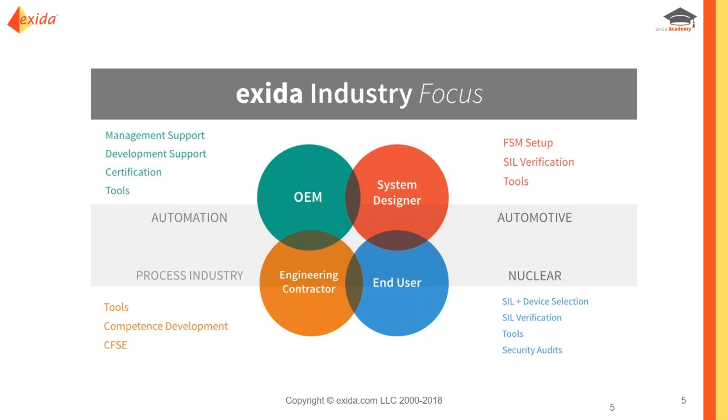How we're able to achieve all of that is we set up different silos of our business, whether it's consulting, where we're going out there just helping them where they're not achieving any type of certification, or working with engineering tools. This is an area I learned quickly to love. I was one of the old-fashioned ones who wanted to do it all myself, but man, the tools are so nice, they save you so much time.

Today we'll be talking about product certification and how to use a certified product. And then, of course, we have training, reference materials, and personnel certification if you yourself want to become a mentor or leader in the industry.

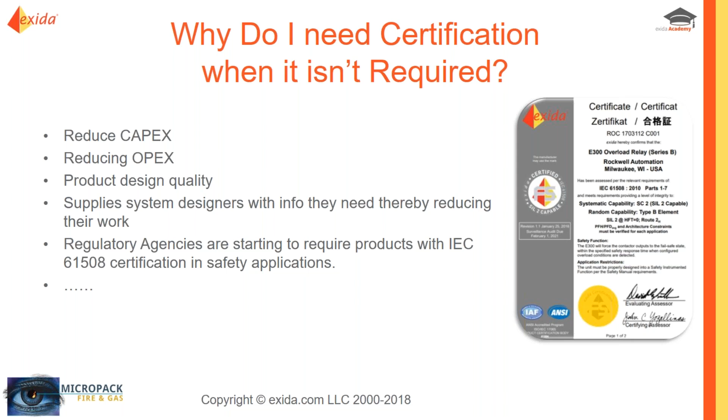Now let's go through these certification processes, and then we'll pull James in, who will teach us how to use these products correctly and the advantages and disadvantages of them.

Before we talk about the 3 paths, I want to share one misnomer: people think when they get a product certified, the certifying body has to do everything. No — that's only if the manufacturer doesn't have experts in-house to do these tasks. The only 4 things exida, or a certifying body, really needs to do are the black boxes you see in front of you: the gap analysis, the architecture concept review, the safety case review, and issuing the certificate. For our certifying body, those are the mandatory items. The rest, shown in red, there's no reason the manufacturer can't do those themselves.

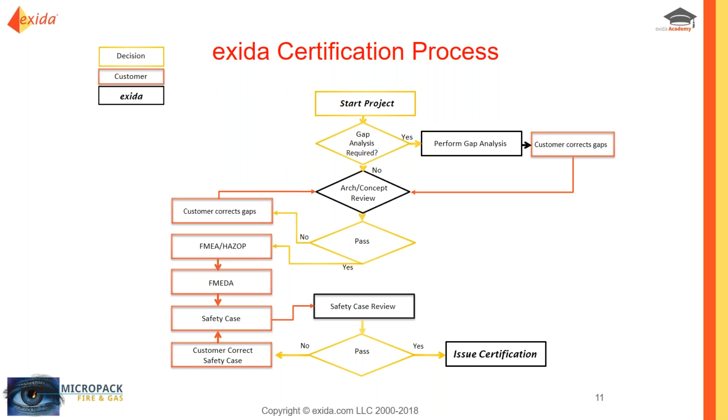Now we'll talk about the different certification paths, since there are 3 options available per our accredited scheme. The first is the design and test process that's fully compliant — that's your new product, maybe still in development, with no field history. You can still go through the process.

Option 2 is where you have a product you want to make changes to — it's been out there a while, and you can produce operating hours, so we can say it's proven in use. The last one is a product that's probably been around forever and is never going to change, maybe end of useful life, but people still want it. You can get that certified as 'no changes allowed,' meaning no modification procedures are needed. That one you can usually get certified quickly because you don't have to meet as many of the standard's requirements — that's also an option.

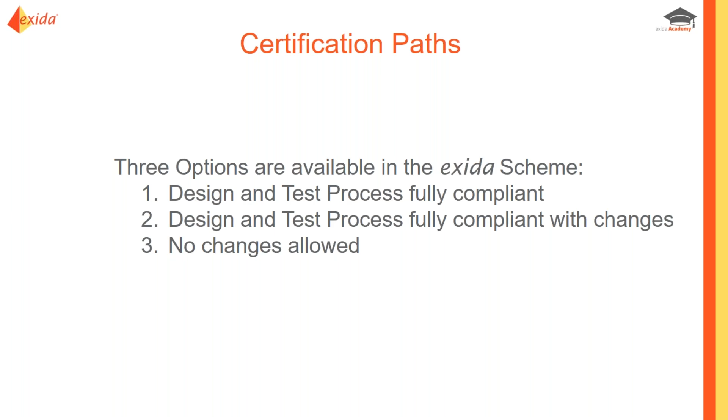So let's go through those 3 options. The first, as I mentioned, is the new product with no field history. The first thing you want is that new design to have a full hardware failure analysis — that's your random failure integrity.

The next step is your new design has to follow the design process requirements. What does that mean? We want to make sure — what did you do for testing? Where was your validation and verification? Do you have an SRS in place? Show me the specs you thought through, because we want to make sure it was built correctly so that when it becomes a certified product and goes into the field, it follows a certain procedure to minimize any kind of risk.

That's your systematic integrity — to reduce systematic failures, make sure you designed it correctly and followed the procedures of IEC 61508, because it wasn't tested and proven yet. It's just a new product; we don't know if it's going to perform correctly. However, because you went through this process, we have better assurance of it.

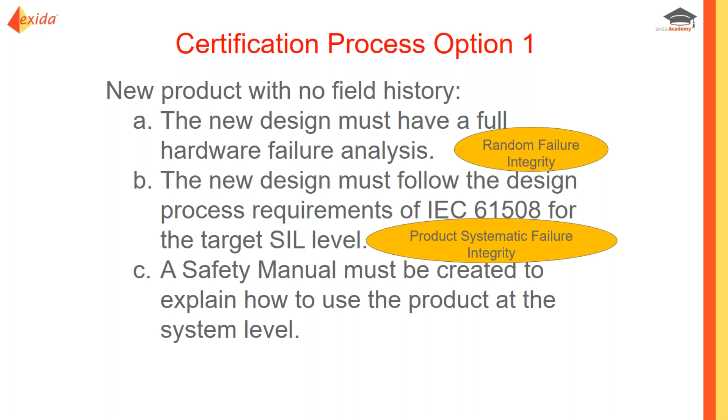The last thing you'll see in all 3 options is that you will need a safety manual created to explain how to use the product, which makes sense. If we look at that chart I showed you previously, that was really just the middle portion — there are 2 tables, one on the left and one on the right: the left says exida analysis reports, and the right says consultant client documentation.

Those are the 2 that just got added in, and we put those there so you could see what exida or the certifying body will do, and what the clients will need to produce. For a new product, as you go through that process, they'll need a functional safety management plan, an SRS, a validation test plan, and it goes on. Once you meet all the requirements, you get your certificate. And that's for a new product.

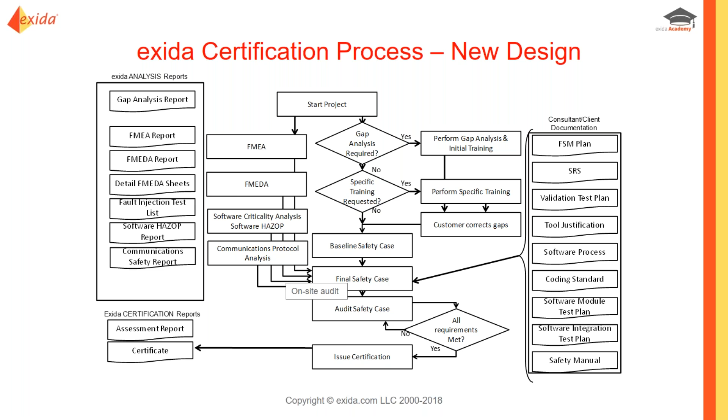I can go into much more detail on this, but we do have other webinars that go into more detail on these processes. If that's of interest, I can provide links for all these. For time's sake, I want to get this webinar over to James, because I feel his section will be very important for everybody on this call.

The next process is option 2. This is where you have a product that's well defined, with field history, shipment information, return information. Maybe you've had 100 products out there, so you have maybe 3 million hours for SIL 1, 30 million for SIL 2, or maybe 300 million for a SIL 3 application for proven in use.

What that's saying is, look, I already have that full hardware failure analysis - that's the FMEDA that will perform for you. What changes is that when you get to systematic failure integrity for that product, you don't have to do some of the design and beginning testing stages, because you've already proven from your failure and shipping information that it's a tried product that works. You don't have failures coming back.

The one thing you'll have to show is that you have a procedure to make changes. Do you have a modification change procedure? How do you make a change? How far back in the life cycle do you go to catch those changes? Because sometimes you'll make a change thinking you fixed a problem, but that change actually messed something else up in your product without you realizing it. So we want to make sure you go back far enough in the life cycle to iron out any other issues that may come from a different change.

Option 2 is probably the most popular - it's what most people go for. Why? Because it gives you flexibility. You don't have to run to a certifying body every time you make a change anymore. You can make your own changes, and when it comes up for renewal, you just tell the certifying body what you did. They'll review those changes, and you're off and going again. It's a very nice process.

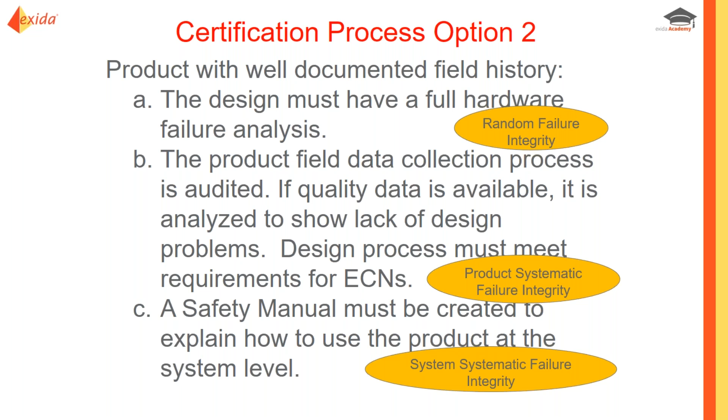Option 3 is for when, maybe, you have a product going end of life, or you need to beat your competitor to market and have it certified. You can go this route, which is basically like an instant in time - to this revision, this model exactly, I want this certified. I'm not going to make any changes. This is what I'm selling, and this is all I want.

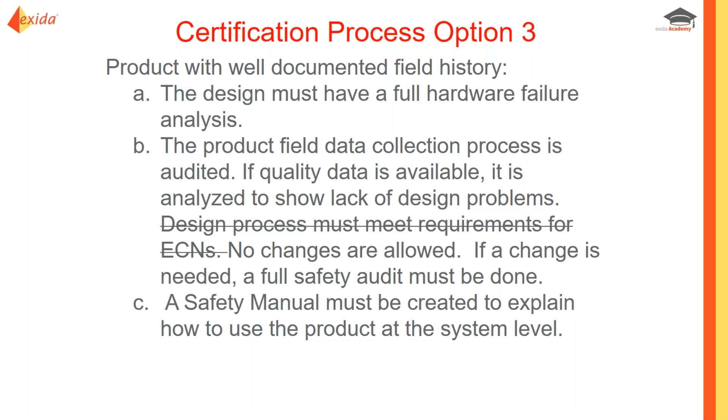If you do make a change, you're going to have to go back to the CB, because all that's certified is that one instance, that one revision, that one model. And then, of course, you'll have that safety manual that's going to explain how to use that product.

Look at all those red X's, or those red boxes there. Notice everything that you don't have to do. And that's why this process is so much quicker, because there's a lot of things that you can avoid, that you don't have to worry about.

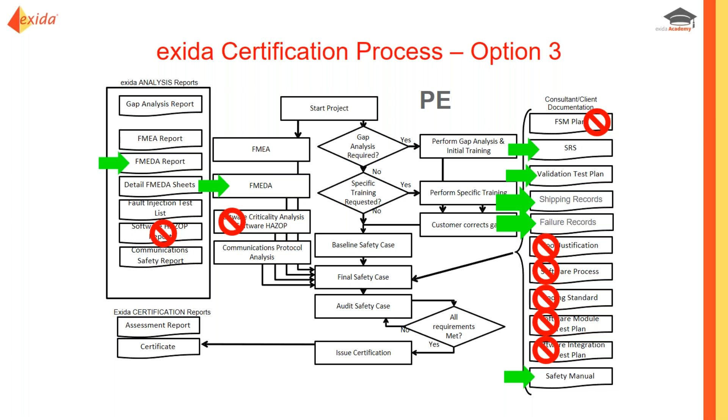There are people that have chosen this route simply because, one, they want to go to market faster, or two, maybe the opposite - they've been out there for so long, they just need to get it certified. Because end users are wanting these certifications more and more, since it's less work for them.

All right, so kind of to recap here, and then I'll jump this over to James. So what is the value for manufacturers? Well, the first thing is you get that third-party review of the product.

What is the CB's main objective? We want to find faults in the design, because that ultimately reduces the life cycle costs. It helps you with redesigning a product, because that can be so expensive. The sooner we can get in there and find anything, you can make those changes sooner.

The next thing is it does increase the marketing and the sales efforts. You now have something that's a step above your competitor if you get something certified.

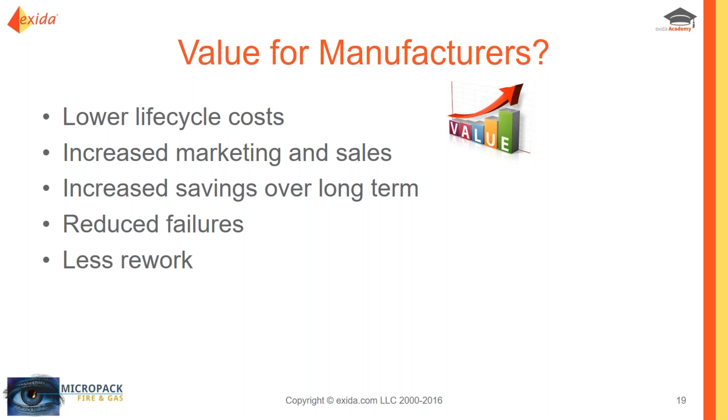And of course, there are going to be increased costs initially, because you have to pay money for a certification, but there is a lower risk with your product when it gets out in the field. You get less returns, you don't have to worry about rework, and there is a savings over the long period of time.

For an end user, here you're going to have less spurious trips. Why? Because it's going to help with unnecessary shutdowns, since you're developing your system correctly. Maybe you have too much redundancy in your current system because you didn't know if it could have redundancy, if it needed redundancy.

You do have that increased safety. You will get less failures in the field, because that end user is now using that product correctly. There's no guessing involved - they didn't have to do their own calculations. You come out with a more robust system.

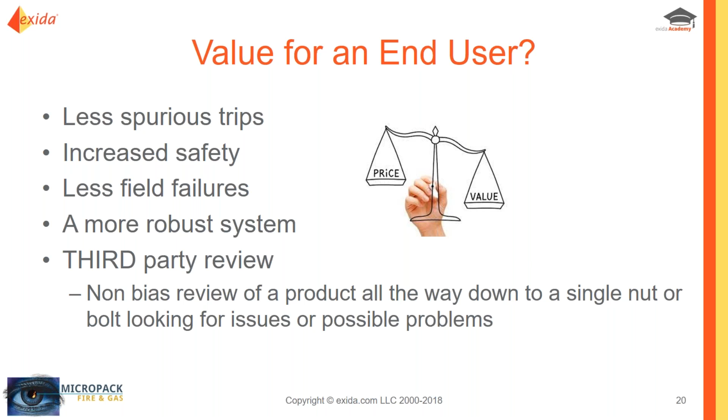And of course, most importantly, you get that third-party review. That's so important because every person that's selling you a product is going to tell you they're the best, with 30 reasons why they're the best and why their competitors aren't. Here's a way for you to say, okay, this is a third party - they're completely impartial. They judged it based off of numbers and analysis, with no emotion tied to it. So it's kind of nice, and end users usually appreciate that as well.

So the next thing here is, sure, you get your product certified, and it's what I said at the beginning - it's really not the end of the road, because in fire and gas, not only should you make sure the product is used correctly, but even the placement of that detector is so critical.

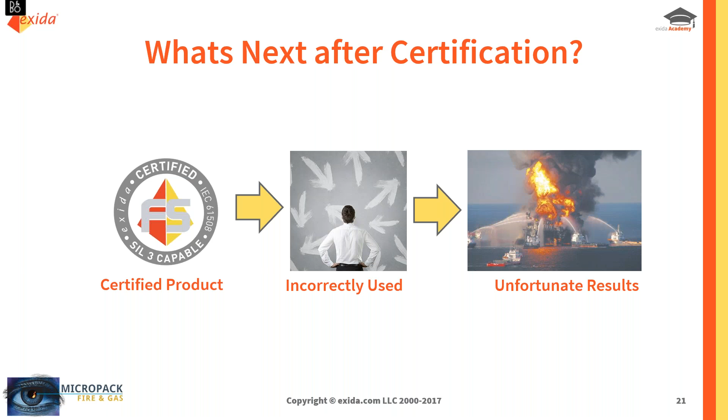We're a hazard detection company. We've been involved in fire and gas detection since the 1980s as an organisation based in Aberdeen in the northeast of Scotland.

We carried out the first fire and gas mapping review in 1989 in the Forties field in the North Sea. Although it wasn't referred to as fire and gas mapping at that point, that term essentially was coined in the early 1990s. Our core business is very much in consulting and software, the provision of fire and gas mapping software tools.

The Micropack consultancy team design hundreds of fire and gas systems annually. We also provide our 3D fire and gas mapping software, which is commercially available, and provide fire and gas training should an organisation wish to take that expertise in-house. Micropack run the Micropack Exida Fire and Gas Detection Design and Technology course, the Fire and Gas Practitioner course.

Those areas of the core business are very much related to the consultancy, but we do have another arm of the business, which is flame detection. We pioneer in intelligent visual flame detection, but a lot of people don't realise that we also develop conventional flame detection, or some of the more traditional technologies as well, the likes of triple IR flame detection, the radiant-based flame detection. So we essentially have two main strands of the business: flame detection, and consultancy and engineering, and the software as well.

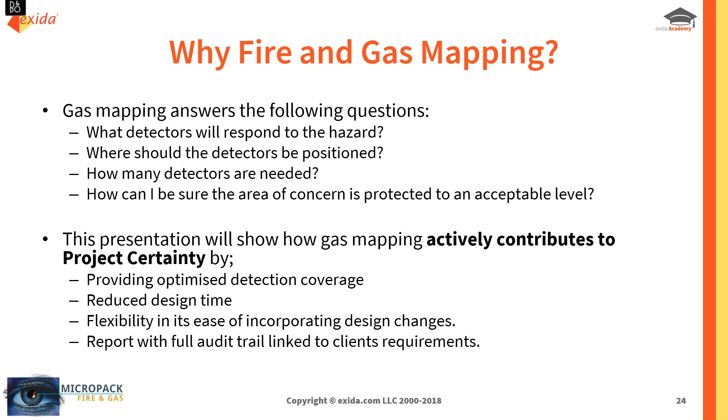Gas detection mapping, if applied in a reasonable manner, can help achieve project certainty by providing optimized detector coverage which is verifiable. It can help reduce design time, assist in design alterations, and provide a fully documented audit trail of justifications of the design. It provides performance targets of the system, and all the assumptions and detector location information can be stored within the gas detection mapping project.

So what is gas mapping? Well, gas mapping is the holistic process of determining detector placement through the application of both engineering knowledge of the detection technologies, the application and performance requirements of the system, and also an adequate modelling tool. Notice that engineering knowledge came first in this instance - with any modelling tool, its purpose is to verify the design of an engineer.

The software tools shouldn't drive the engineer, but this has been somewhat lost when it comes to fire and gas detection design. There's been a real drive towards how important the software aspect of the design is. So we feel it's quite important to bring this back more in line with other engineering disciplines, where the engineer still designs the system and the software verifies any assumptions made in that process.

With respect to the process, the engineer would typically review the hazards, the escalation potential, performance definition, mitigating actions, and so on. The modelling tool of choice would then be used to apply detection thresholds, detector positions, the detector voting of the system, which provides the detection coverage and contributions. The engineer then reviews those coverage factors and takes a decision on the adequacy of the layout of detectors, and logs those results.

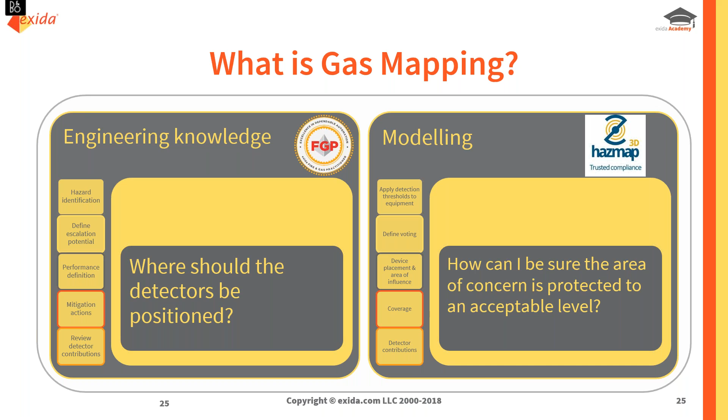As we're designing a gas detection system, rather than a gas sampling system, we're concerned with the gas accumulations which might result in a deflagration. A common performance requirement for gas detection is to prevent an explosion overpressure of 150 millibar or greater, which is commonly associated with pressure-induced damage.

From that, it's quite clear that we don't want to design to detect small leaks, as first of all it's virtually impossible, and it's not a particularly risk-based approach. What we want to design is to detect various gas dispersions that will likely result in the placement of detectors in locations where the gas accumulation may actually present the risk, the accumulation of gas rather than just where the gas may go.

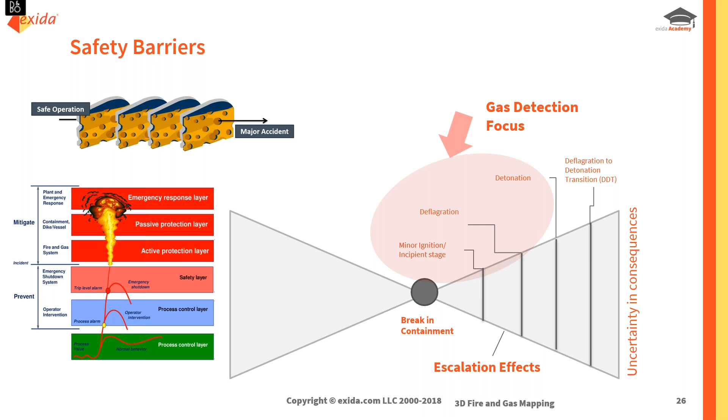This brings us to the application of performance targets. In order to verify detection performance, we require a yardstick against which we can measure the coverage. How we determine that yardstick is the escalation potential of any given process or facility. The easiest way to articulate this is to ask whether we would want the same detection layout in an open onshore process area, where personnel can run away or the processes themselves can be easily separated, compared to an offshore congested area where a gas accumulation would occur in a confined space. Ultimately, these differences will determine the ignition potential and the escalation of that ignition, which will later form the target that we want our gas detectors to meet.

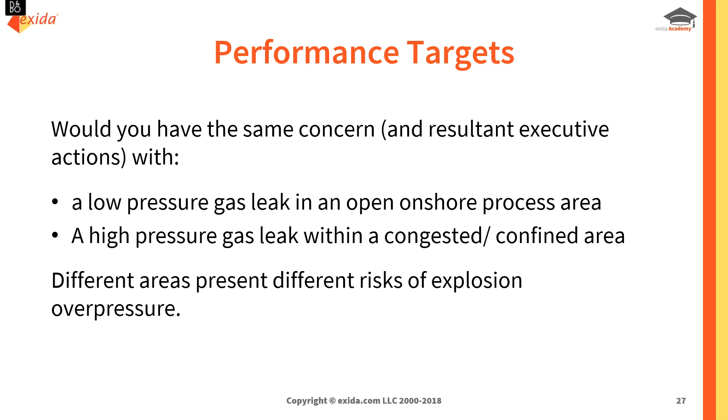With these performance targets being fundamental to the resultant number of detectors required, we define the performance targets as a formal statement of how you want the gas detectors to perform. In order to do this, we require a methodology from which to define that target. This methodology can stem from an end user's own guidance or philosophy on how to design gas detection, or it can come from a national body with a standard or regulation, although they are not particularly common. So there's usually a gap there with respect to what the overarching methodology should be, and where those gaps exist, it's important to iron out in the early stages what the intention of the gas detection system is, so that all parties are clear on what the philosophy behind detection should be.

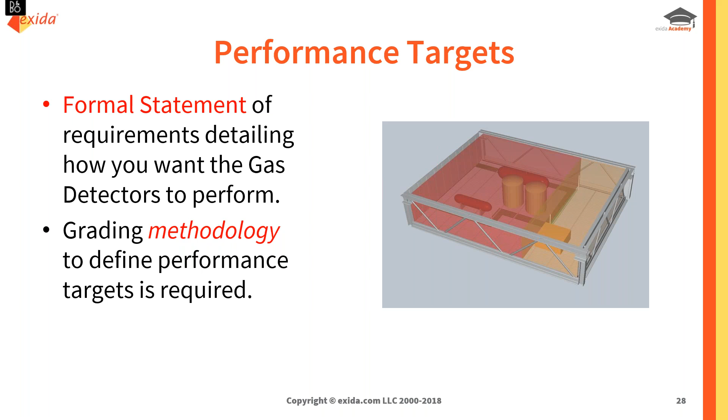There's an ongoing debate in the industry about where and when to apply dispersion modelling to gas detection design, where we would be predicting where the gas can go. Unfortunately, there's a lot of contradictory and often misleading information out there with respect to this. It can be difficult to know what methods are applicable and ultimately what design method would present the optimized layout.

When deciding a way forward with respect to gas detection design, we have to consider what the intention of the design is. Our gas detectors are installed to mitigate the consequences of a release of gas. The Health and Safety Executive in the UK, in their research into the subject, discusses that the systems are there to prevent explosion overpressures above a specified threshold. It's therefore safe to say that our design should focus around ensuring that a certain volume of gas, which would present that gas explosion overpressure, doesn't occur without being detected by a device. That's where the target gas cloud methodology comes from. It sets the volume of gas of concern as the performance target and guides the designer to position the detectors so that that specific accumulation doesn't remain undetected.

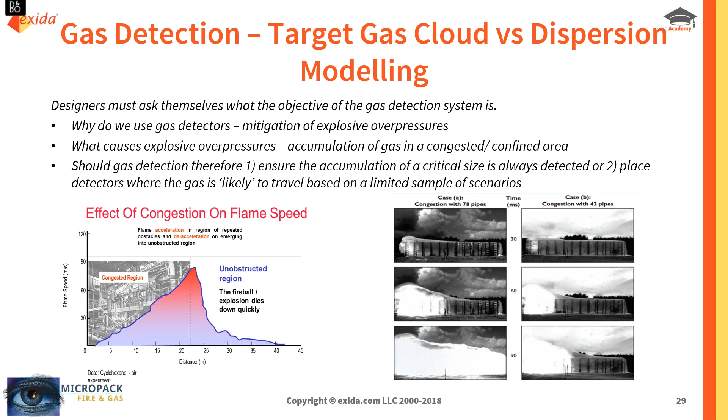This approach of ensuring gas clouds of concern are not undetected doesn't fit well with a method which attempts to detect based on probabilistic gas dispersion. These methodologies often allow detectors to be removed if the gas doesn't travel in that direction in enough of the dispersion scenarios. The approach doesn't account for the fact that those scenarios may result in the highest consequence with respect to accumulation of gas. When we consider risk approaches like, for example, as low as reasonably practicable, it's fair to say that if a gas detector only detects gas in 1% of release scenarios, it could be removed.

But this would be a difficult justification in court, for example, which would use the so far as reasonably practicable model, which is a far more precautionary approach, and generally would say that if a barrier can be placed and wasn't placed, that's a very difficult position to defend.

In the event that there is an explosion, for example, with multiple fatalities, someone could argue that we removed detection because it was only operational in 1% of our dispersion models, so the problem was unlikely. But a prosecution lawyer would rightly say, what do you mean it was unlikely? There's been multiple fatalities. So this is particularly compelling when we consider the alternative method, which would ensure that a gas cloud of concern would be detected 100% of the time, notwithstanding all the discussion that Ted had at the start of this presentation about how reliable our gas detectors are and how reliable the mitigation functions would be.

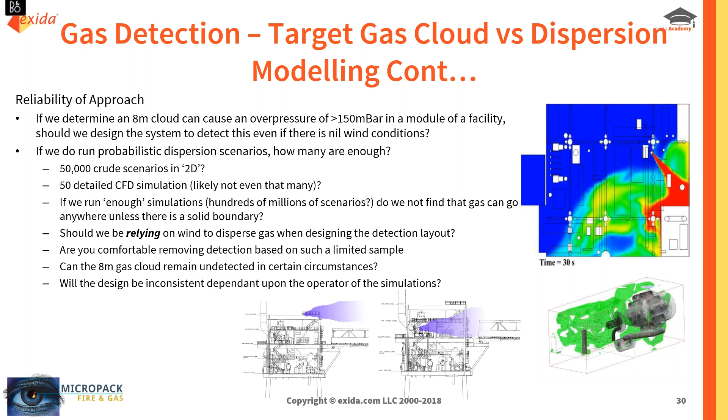So we'll start by looking at some of the regularly cited statements on gas detector effectiveness. Now, the UK Health and Safety Executive statistics show that around about half of the gas releases in the North Sea in the oil and gas industry were undetected over a 20-year time period.

This has led to a narrative being drawn which is not necessarily based on factual analysis. The narrative states that gas detector placement is inadequate and the methods on gas detection placement are inadequate. What's not considered in that analysis is whether the gas releases were large enough to the point that the gas detectors would be expected to respond.

And that's with respect to accumulation, not the size of the release itself. It doesn't review that the layout of the detectors was even in compliance with the method which was expected to be employed. And also, were all the gas detectors even operational at the time of the release? Now, with the number of gas releases, it would be difficult to gather all of that information, but we should be a little more hesitant about drawing fundamental conclusions based on that sample, with that limited data.

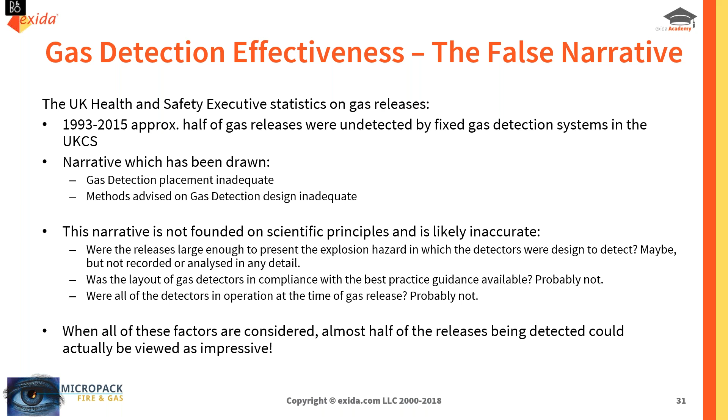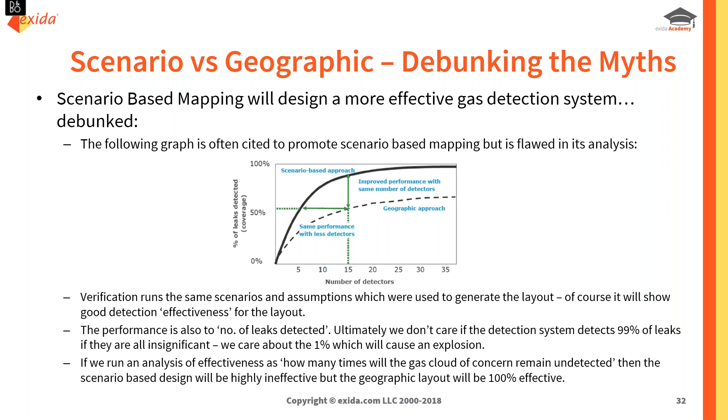So the number of detectors in a scenario-based assessment will be primarily dependent on the number of scenarios that the designer decides to run. It's worth noting at this point that no overarching framework or international standard or guidance exists which can be used to determine how many scenarios are adequate. This opens up the significant potential that two identical areas with identical risks and processes will have wildly different gas detection layouts. A nightmare for change management and auditing, I'm sure anyone in those industries could appreciate.

If we run only one scenario and place the detectors where the gas goes, this will result in hardly any detectors, and they'll detect 100% of the gas release scenarios modelled. Now that's an extreme case, but does show some of the problems associated with this form of assessment, in particular for external applications. Now, no engineer would class that as a representative sample, but I have seen designs which would rely on between 10 and 20 computational fluid dynamics scenarios and place detectors based on this.

This is with no appreciation given to whether the gas cloud migration to that location actually presents the root problem the gas detectors are intended to mitigate, which is explosion overpressures.

So even scenarios where tens of thousands of releases are modelled with some fairly significant assumptions built in, surely can't be classed as adequate. As previously mentioned, this is still less than 1% of the potential scenarios which could occur, and generally won't account for factors, as I said, like near field blockage, which impact on practically every gas release in a process area.

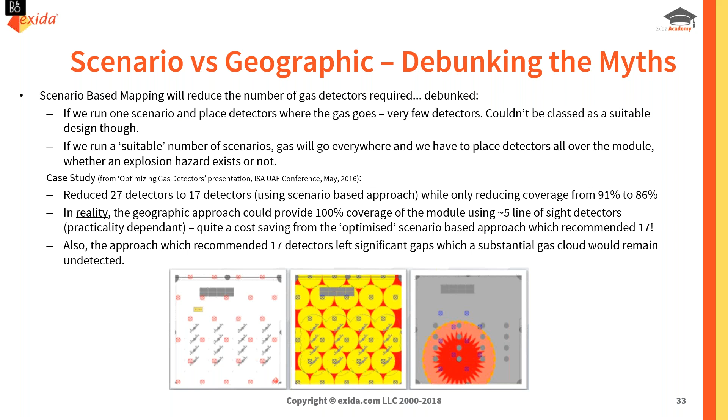Now, moving away from the methodology aspects of optimized design, detection technology, as with flame detection, is critical in making sure that we don't over-engineer the system. The technology also needs to be deployed in adequate locations to allow for maintenance accessibility, and also in such a manner that it will allow adequate operation of the devices themselves.

So should open path gas detectors be used, for example, a clear line of sight has to be required to make sure that the receiver can receive the signal from the transmitter.

The gases intended to be detected have to also be reviewed to ensure that the technology applied will be appropriate in detecting that gas, along with calibration requirements to ensure that we don't underread a potential gas release whenever there's potentially mixed streams, for example, in the process.

Set points of the devices should also be considered with the voting logic, as these kind of decisions are going to impact on the resulting coverage and the suitability of the system. If executive action requires 2 alarms on the high gas alarm set point, then this will result in a poorer target gas cloud coverage compared to executive actions on 2 low gas alarms, for example, with the low gas cloud diameter being much larger.

But this can give rise to a higher degree of false alarm potential if you lower that set point. So it brings us back to the selection of the technology based on the environment, which is just as critical as the modelling portion of such a review.

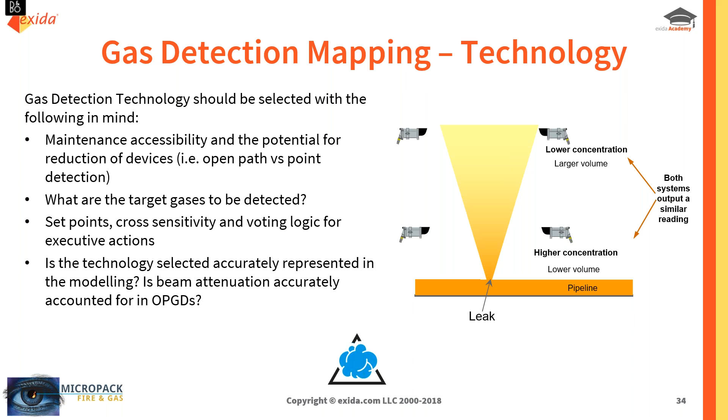We then have to grade the volume based on our escalation potential. So what kind of gases do we want to look for in the area? We then place any existing detectors that may be in the area, and then we can run our coverage assessment.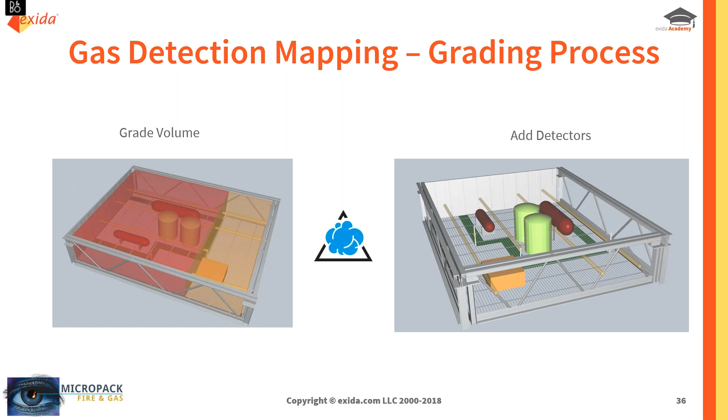But what it does show is that you can actually have multiple gas grades even within one volume. So on the left-hand side there, you can see that we've got a congested region with a bit more equipment, with the red graded volume, which is looking for a smaller target gas cloud because that area is congested, and therefore a smaller gas cloud will result in explosion overpressures with the amount of pressure pushing back on that flame front. The orange area represents a more open-based area, so the target gas cloud of concern can be relaxed and is a little bit larger. Therefore, we can optimize that system throughout that process area.

We've got a few examples here of some assessments showing that three-dimensional coverage. To summarize, the green volume is where we achieve 2 out of n executive action coverage, meaning 2 gas detectors are activated by the target gas cloud of concern. The orange areas show 1 out of n coverage, where the target gas cloud would only intersect with 1 device. We can also get the percentage coverage as output from the software to help the designer.

Sometimes looking at the 3D volume can be a little tricky if it's quite a congested area, so you also want to look at these coverages from a 2-dimensional standpoint. For this presentation, we've taken 3 slices at 3 different elevations to give a representation of that coverage.

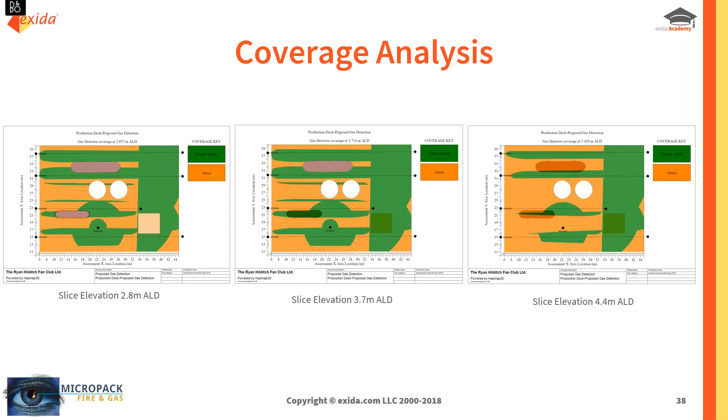Quite importantly, we also have the detector contributions. These are important during design because they help the engineer decide where best to place detectors, where they'll perform well and detect the gas clouds of concern, and where they're performing not so well, so we can relocate that device or remove it entirely and optimize the system.

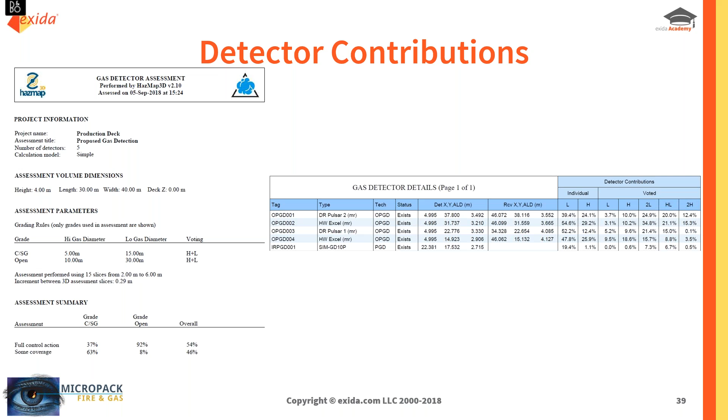Another useful application for detector contributions is maintenance. If you're operating a plant with 30 gas detectors and 3 are in fault, you can look at the detector contributions and make a much better decision on which detector to prioritize. If a detector represents 30% coverage of a volume, that becomes an important detector to bring back online.

So essentially this constitutes a requirement for both reliability and design through mapping, which would include engineering judgment and modeling portions, and also an appreciation for the reliability of the devices to ensure that if gas does reach the device, we can trust it will act appropriately and respond how we intend. All these factors come together to form what's referred to as fire and gas mapping, the combination of fire and gas engineering and fire and gas modeling tools.

So at this point, I'm going to hand back to Ted and thank everyone for dialing in once again. Hopefully it's been informative to you. I think we've got a little bit of time for some questions, although I may have overrun ever so slightly. So back to you, Ted.

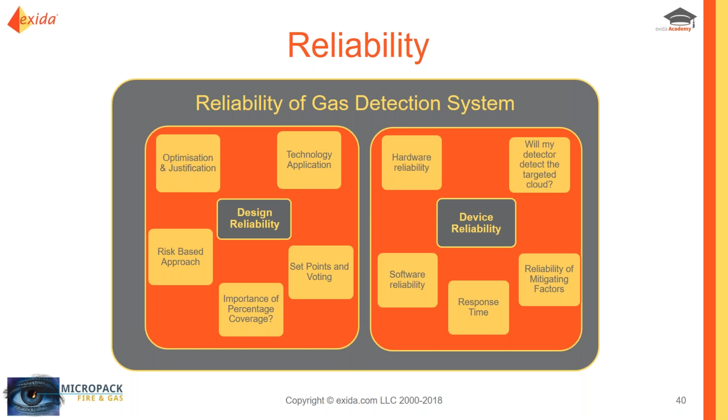Yeah, that's a good question, and the answer is that there isn't really a set answer. It always comes down to engineering judgment, unless the operator or end user has a specific requirement. A couple of end users in oil and gas do have requirements with respect to gas detection coverage. A common one is 95% of the volume covered for a single device for alarm only, and then a second device to give executive action through 90% of the volume. Other operators have specified 80% coverage for gas detection.

The one exception would be where spacing is applied. There's another methodology I didn't really touch on, which is the spacing requirement. We often hear 5 meter spacing referenced. In an example like that, technically you have to hit 100% coverage, otherwise you haven't met the prescriptive spacing requirement. You either have a detector at that spacing or you don't.

The reality is that generally you would accept a little bit of leeway. You would expect if you get 95% coverage through a 5 meter spacing design, an engineer would look at that, see where the gap is, and take a view on whether it's adequate or not. So each individual area very much has to be taken at its own merit. And if it's a little bit borderline, there's no harm in opening it up to a group to discuss and decide whether that coverage is adequate or not.